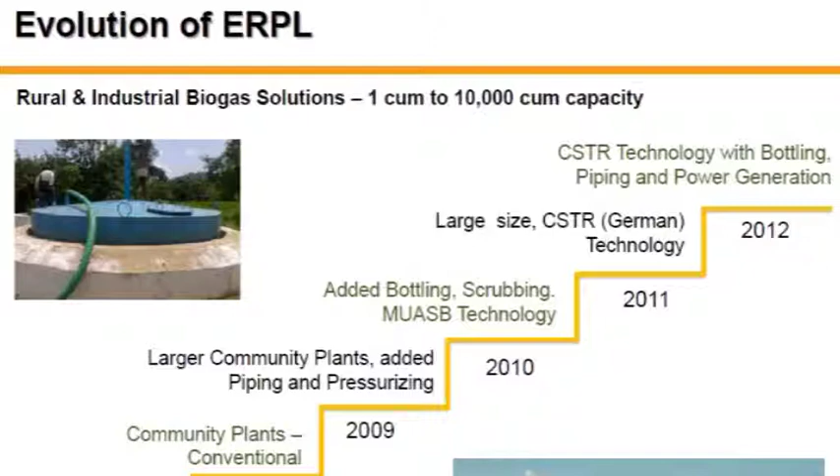So this company, Excellent Renewable Private Limited, was formed all the way back in 1992. In the first 10 years, it was focused on solar hot water, solar cooking. In 2002, it went into biogas generation. And initially, it focused only on the KVIC domestic plants and KVIC model.

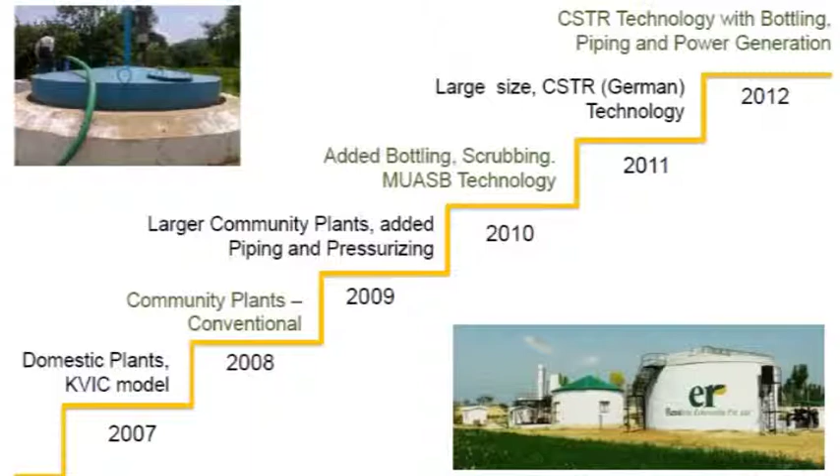Now, the KVIC model that you have heard about, these are the ones that are very successful. They've been going on for the last 50 years in Gujarat, and many of the plants, including the ones at Muniseva Ashram, have been running for the last 15, 20 years without any issues at all. They are floating dome plants. And we'll talk more about those plants later.

Then, taking the same KVIC design, we developed a community plant, a community type of distribution network where the gas was actually distributed in the entire village. And one village was very successful, and that was also in Gujarat. And earlier today we heard about the issues that we have with community plants, that is true. It's very difficult to get the community together to work in a collaborative fashion.

But one plant works in a town called Bitmudrak, and it works very well because the entire community is mainly made up of Christians. And the padri there, the father, said that you are all going to help with this biogas venture, and they've been helping out, and it's been working very successfully. Except the last time I went there, a year and a half back, I asked them how the plant was working. And they said that out of the 70, 80 villagers who have been getting the gas, now half of them don't want to give their cow dung to the plant.

And I said, why? And what really happened is the government subsidy. A year and a half ago, the government came out with a subsidy that the people below poverty level would get 1 LPG cylinder for like 340 rupees, and they can get 1 cylinder per month. So if they can get an LPG cylinder that cheaply, why do they really want to bother about doing all this work?

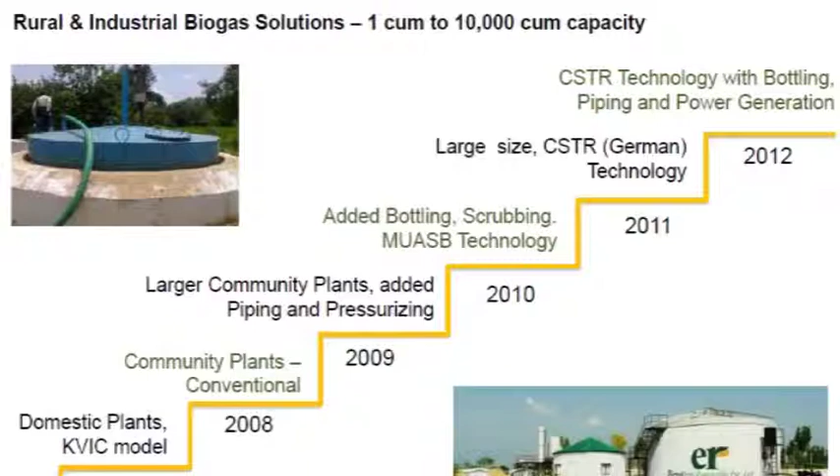Moving on to the large community plants, we have added piping and pressurizing. What we do is we pressurize the biogas so that it can go a very long distance, up to 2-3 kilometers, and it can supply not only cooking but also heat for boilers and furnaces. There was a new technology that we added, and that was MUASB, that is a modified upflow anaerobic sludge blanket digester. We have implemented an example of that, and it works very well also. We'll talk a little more about it when I show you the slide on that one.

After that, we collaborated with German partners, and we have implemented continuous stirred tank reactors. These are large digesters; they can go from 600 cubic meters up to 1,000 cubic meters, and even up to 10,000 cubic meter digesters. We have built 600 and 1,000 cubic meter digesters there.

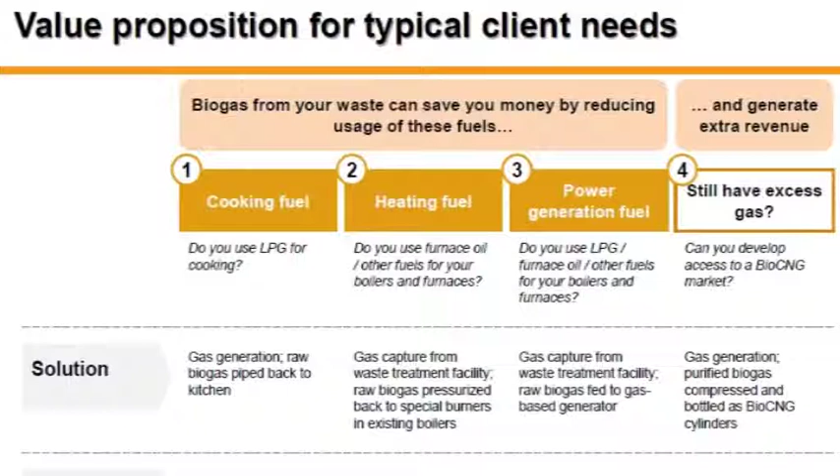So the value proposition for typical client needs: if it is going to be used only for cooking fuel, then it's a relatively simple solution. The cost here can be 8 to 12 lakhs. Now, in the previous presentations, you have heard different cost numbers. So let me tell you that the Gujarat government has a very successful subsidy program where, through MNRE, they are giving 75% subsidy to the Gaushalas, and for private companies, they are giving 50% subsidy.

To give you an idea about the cost of these, the L1 rates that the Gujarat government has set up for the smallest size, 25 cubic meters, go for about 6.5 to 7 lakh rupees. That's the complete digester with the piping and the burner, everything. The largest one is 85 cubic meters.

And the 85 cubic meter goes about 13.5 to 14 lakh Indian rupees. So that gives you an idea that the cost that we are talking about, they are about in the same ballpark. And these are the floating design, so that has its own gas storage volume included.

The heating fuel, where the biogas is used for heating fuel, is typically used where there is a factory where they have an ETP plant, and that is already generating biogas, and in many places that's being flared. In these types of places, it can very easily be used for industrial purposes in the boilers or for furnaces.

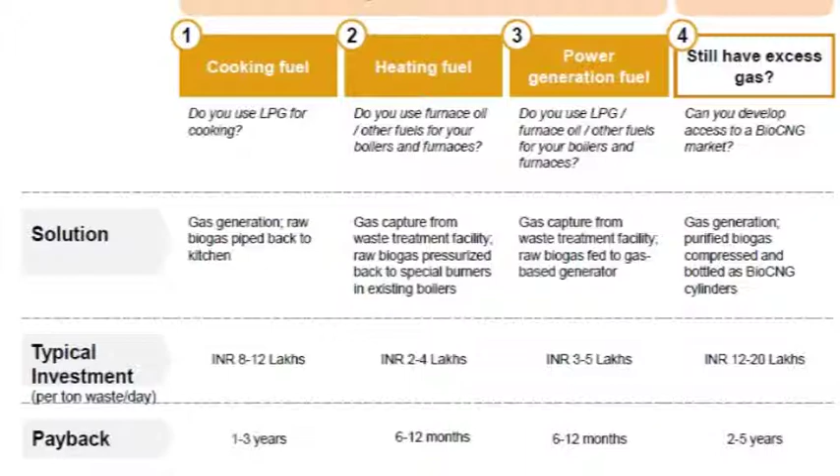Now we are working with Thermax, they have provided dual fuel burners that can take two different fuels at the same time. So depending on what is available, it can really do that job. So these are the heating fuel solutions.

Power generation, we have also heard from many of the speakers today that it's very easy to generate power from biogas. It does not require a lot of effort and work to generate electricity. The only thing is that in India, the pricing is such that for using biogas to generate power, the payback works out to be longer because power is relatively cheap compared to CNG or piped natural gas, PNG.

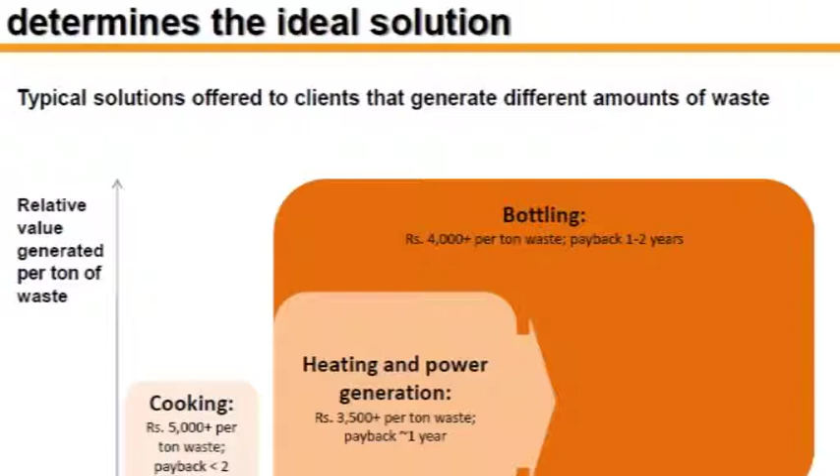So the amount of raw biogas that you have really determines the ideal solution. Of course, how you want to be using your biogas is important to you. But if you have, let's say, 50 to 100 cubic meters of biogas, then ideally it can be used for cooking. If you have 85 cubic meters, it's actually cooking for several families, not one family. Going on to 100 to 500 cubic meters, it can be used for power generation, it can be used for heating, and beyond 500 or 1,000, we can think about bottling, where it becomes economically feasible and viable.

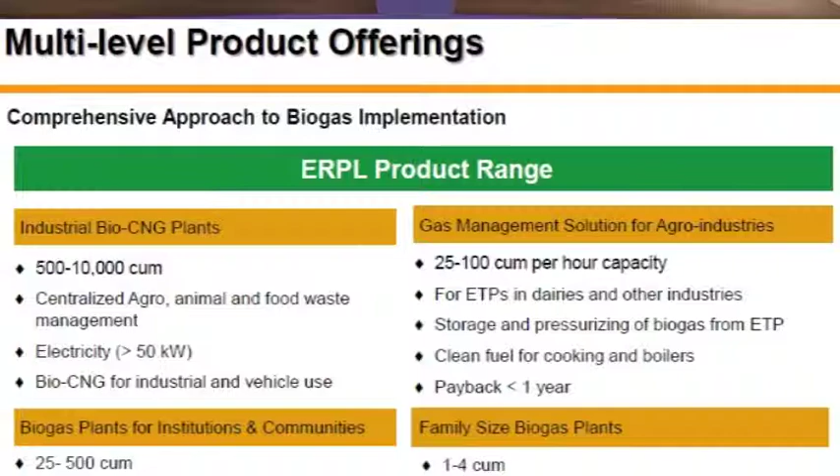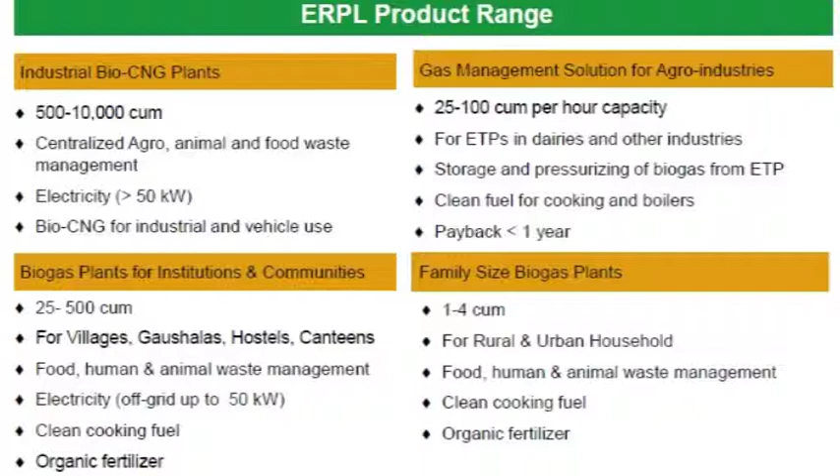Now, today I think there was a question about bottling. When you have a large quantity of biogas, bottling is a possibility, but it has its own issues that I'll talk about a little later. So our company has several product ranges, starting from a family size biodigester, which is only 4 cubic meters, made from molded plastic boxes, to large institutional biodigesters that can be 1,000 cubic meters or larger, made from RCC tanks, complete with heating solutions and agitation.

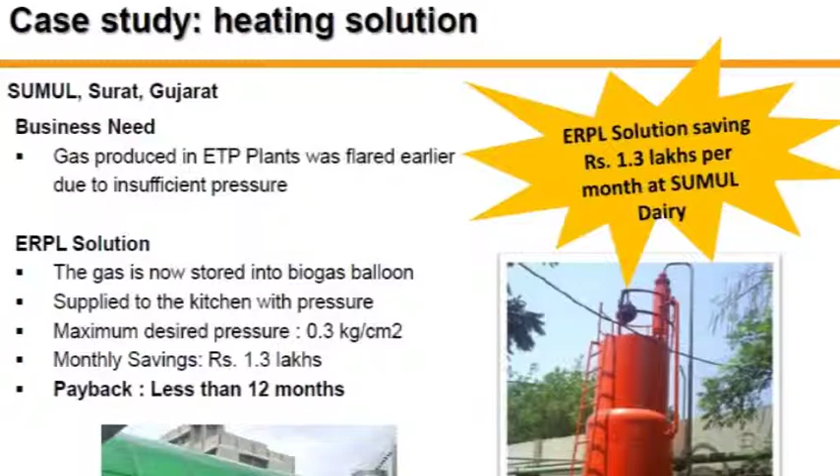So I'm now going to show you a few slides of actual implementations to give you different ideas and different ways you can use biogas. So here, this is at Sumul dairy, where they were flaring this biogas. And rather than flaring, we stored it in a balloon, and from the balloon we provided a pressurized system, a pressurized tank, and through that we are supplying a continuous supply to their furnace or boiler. And the payback is less than 12 months, because here you're basically not building a biodigester; all you are providing is the storage solution and the distribution system.

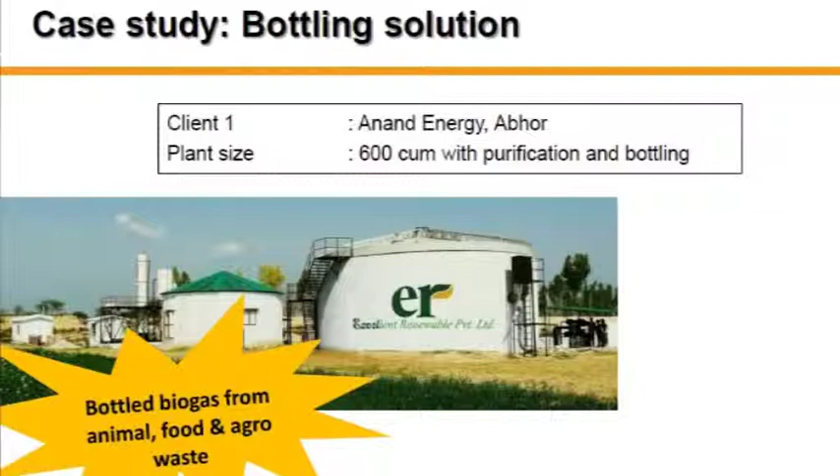The bottling solution, there are several plants that I'm going to talk about. This one is a 600 cubic meter plant, a 1,000 cubic meter plant, and a 600 cubic meter plant. All these plants are based on cow dung and agricultural material, and they produce biogas, which is then purified and bottled in cylinders. I'm going to talk in more detail about that a little later.

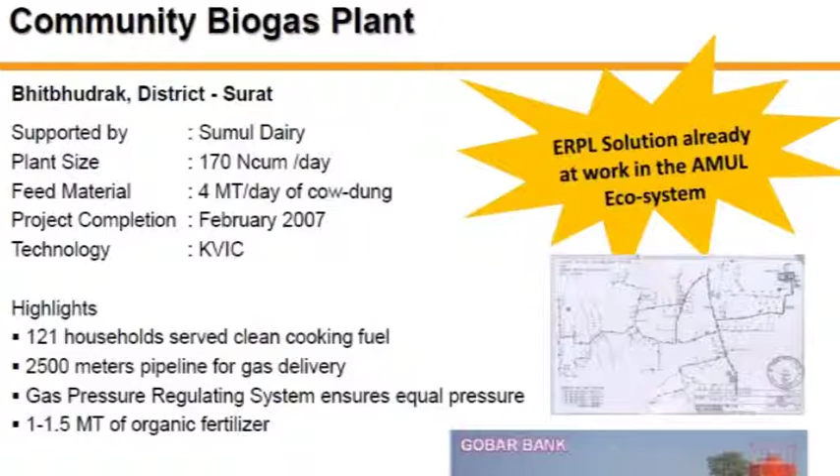This is the community plant that I talked about at Bhitbhudrak. There are 2 digesters of 85 cubic meter each, so total 170 cubic meter digesters, and it used 4 tons of cow dung that was collected from all the villagers, and the villagers were given the biogas 2 hours per day free of charge in exchange for the cow dung that they are providing. But also they were paid some amount of money for the cow dung that they provided.

The slurry that came out from here was actually converted through vermicomposting, and today they sell that vermicompost at 4 rupees per kilogram, or 400 rupees for 100 kilogram, or 160 rupees per 40 kilogram bag, and they are selling that to the municipality of Surat, so that's what is really helping generate revenue for this community-based biogas plant.

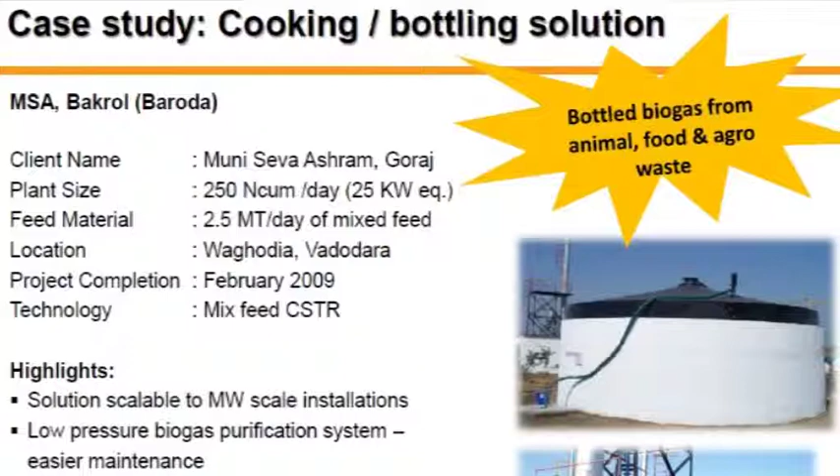Now I have a few more slides about the plant at Bakrol, which is the Muni Seva Ashram in Baroda. And actually this is the implementation where, for the first time in India, raw biogas was actually purified using a water scrubber system to remove the carbon dioxide, and then it was compressed.

This plant was running since 2009-10. And in about 2011, MNRE held a conference there and invited a lot of people from all over India. So there were like 250 participants who came to Muni Seva Ashram to learn this scrubbing and compression technology. So I'll talk a bit more about that here.

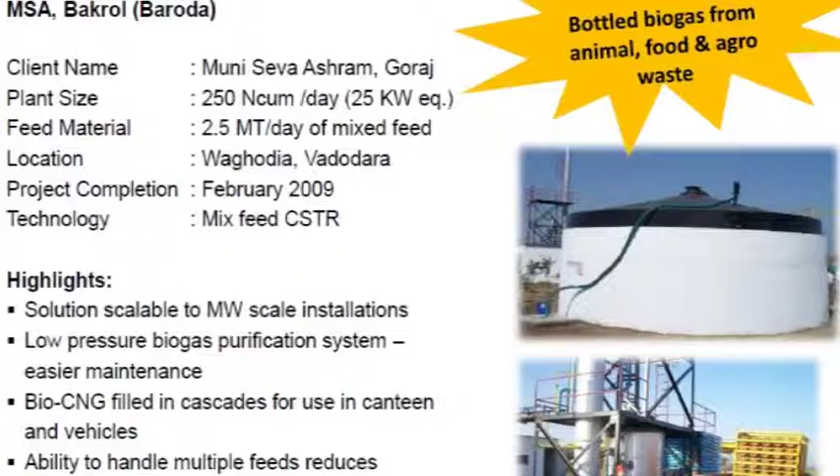So this particular system today is made up of a UASB plant that I told you about. The UASB plant is basically a sludge blanket reactor. It's a passive system, but it passively provides some circulation of the gases within the digester, and that's how it provides that mixing and minimizes the foam and scum formation. It does have a scum breaker that is run once a day and breaks the scum.

This is a mixed feed plant, so it takes kitchen waste, cow dung, press mud, chicken litter, and agricultural material also. Cow dung is approximately 50 to 60%, and the other 40% is made up from the other substrates. Along with this, we have two other 85 cubic meter digesters.

So we combined the two KVICs in series with this 200 cubic meter digester. So the 3 of them work very well. They've been running since 2010, and we've been generating electricity.

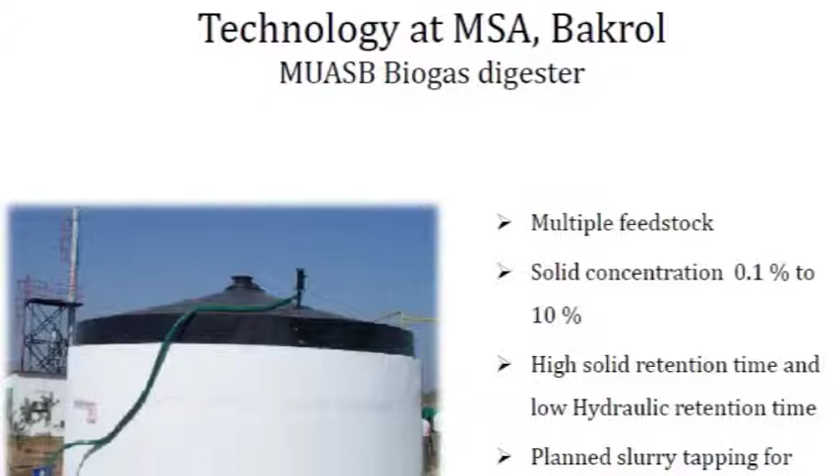This is the MUASB digester. It takes multiple feedstock, as I mentioned to you. The solid concentration it can handle is all the way from 0.1 to 10%. Typically, we stay in the 7 to 10% range.

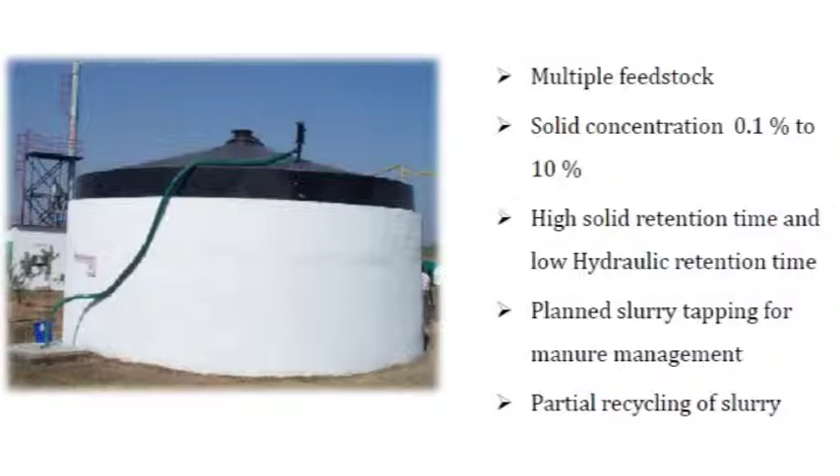It does provide high retention time and a low hydraulic time because of the volume and the internal scum breaking that is provided. And there is partial recycling of the slurry that happens because of the passive airflow. That's how it is designed inside.

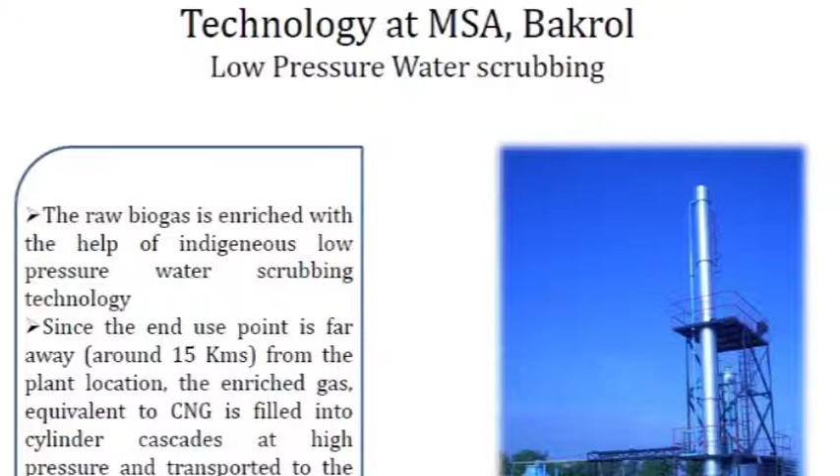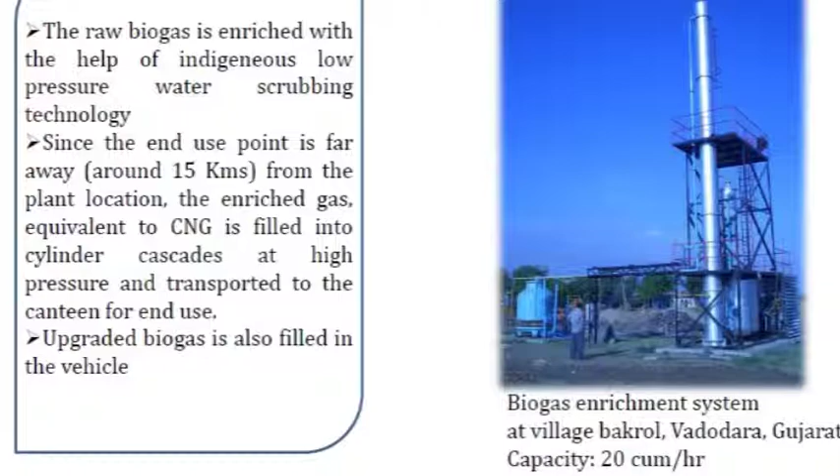So the low pressure water scrubbing technique we pioneered back in 2009 was running until last year. It worked well, but it has severe limitations. And the biggest limitation is the sizing. You cannot design the plant much higher, because when you're scrubbing with water, you also have to remove the moisture that is in the purified gas.

If you don't remove the moisture, then the moisture along with carbon dioxide and some remnant H2S is always going to form acid when it is compressed. At low pressure, it's not an issue. But as soon as you go above 10 to 20 bar, which you need to compress to, it's going to form some acid, and that's going to start corroding your compressor and also the cascade system.

Actually, that's what we were using, a diaphragm pump. So we didn't have that issue because with a diaphragm pump, there is basically a diaphragm in compression. So we didn't have that issue.

And we ran that for the next 3-4 years, but we did see a continuous problem with the needle valves on our cylinders, and we had to continually replace them because they were getting eaten up or corroded by the H2S and CO2 under high pressure and in the presence of moisture. Now, if your gas is absolutely dry, then you won't have a problem. But to get very dry gas, you have to put in either a refrigeration or a dehumidifying system.

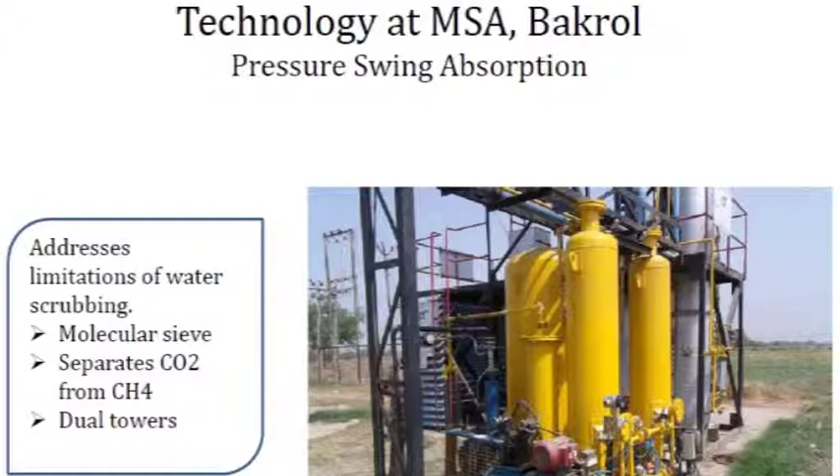Let me move on. The next improvement that we did was we put up a pressure swing absorption system. This was to get over the limitations of water scrubbing: if you want to go to anything more than 600-700 cubic meters per day of biogas purification and compression, you're going to run into that problem with either a low pressure or a medium pressure water scrubber. You will get into that problem. So we put up a pressure swing absorption system.

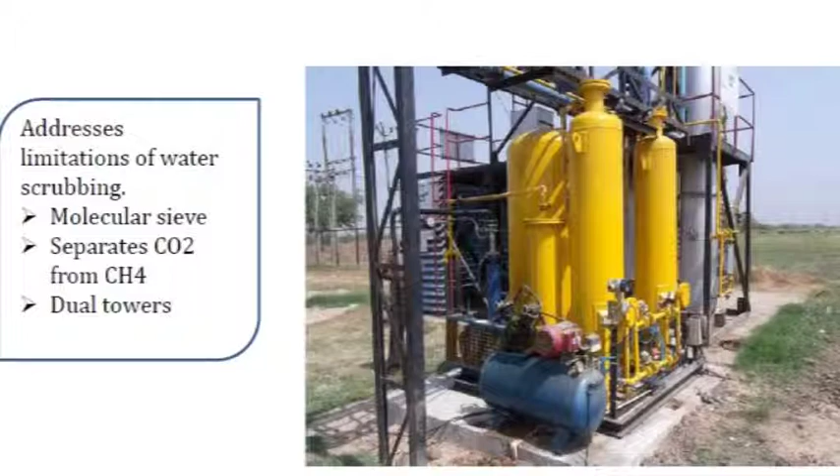This is based on molecular sieve, and it goes through a cycle. For a few seconds, like 30 seconds, one cylinder is filtering the CO2 out, and the methane is being purified, and then it goes into compression. For the next 30 seconds, it goes into the second cylinder, while the first cylinder is regenerating, or removing the carbon dioxide that has been trapped.

There is another potential benefit of this particular system: it lets you recover both methane and CO2. Methane, of course, is going to be a fuel, but even CO2 can have commercial value; it can be used for beverages, and if you can find the market for that, you'll have a dual product here. We've been running this for about a year now, very successfully, with very low maintenance, and it functions very well. It's a very good technology, and I strongly recommend that if you're considering purification and compression, you should consider this PSA technique.

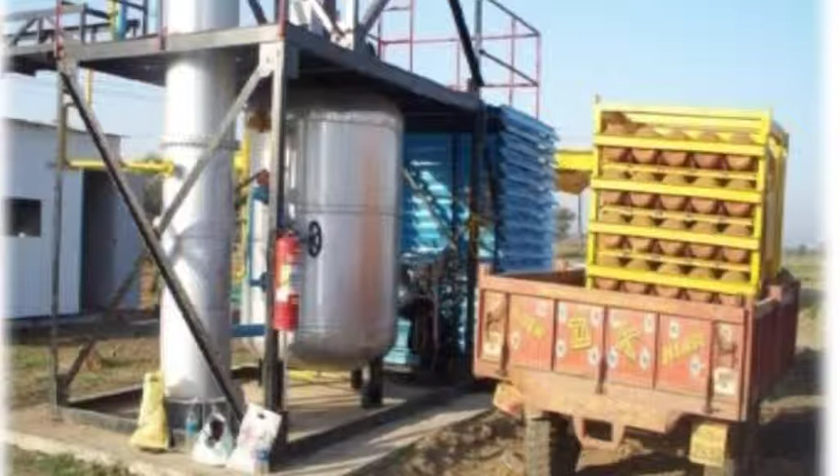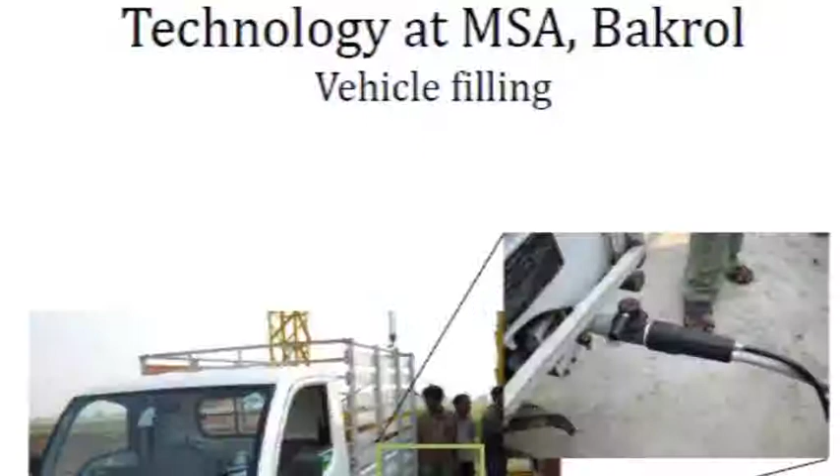We also tried vehicle filling, although in India using biogas for vehicle filling is not allowed. But we have tested it out and it can work, because there is essentially no difference between the refined biogas and the CNG, or compressed natural gas, that we use for filling our vehicles.

In Nepal, I've been working with a couple of companies here who are interested in setting up biogas-based plants. Vajra Eco Resort in Tatopani, up north, pretty close to the border with China. They are setting it up as an eco resort, and they are very interested in setting it up so that it can consume the kitchen waste that is generated there. But not only that, they want to use the kitchen waste generated from the entire village.

There are more than 100 hotels in the village, and they would be collecting the kitchen waste, because today they are dumping all of that into the village and into the river. Also the cow dung: they would have several cows and animals, and all their droppings would be used for generating the biogas. For the products, they are considering street lighting and also cooking gas for the resort itself, but also for the villagers there. In addition, the organic fertilizer would be used on their premises rather than inorganic fertilizer.